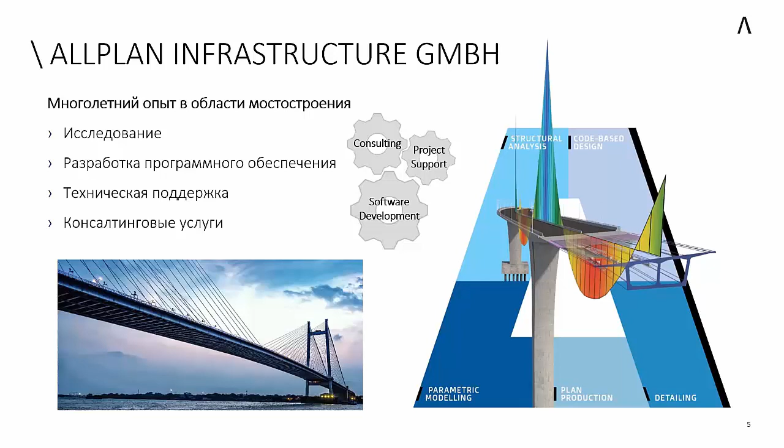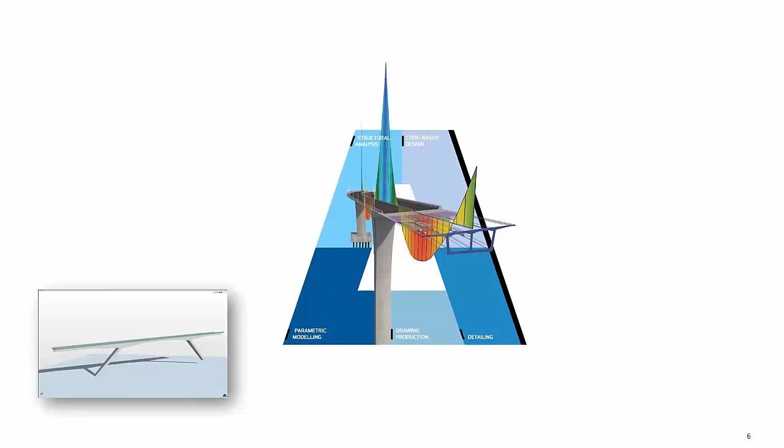The thing that we did starting from 2018 is actually developing the Allplan Bridge software as a part of Allplan. And with this software, you can start with a 3D modeling of your bridge structure, then continue with the construction sequence definition. After that, you can create the analytical model automatically from the geometrical model.

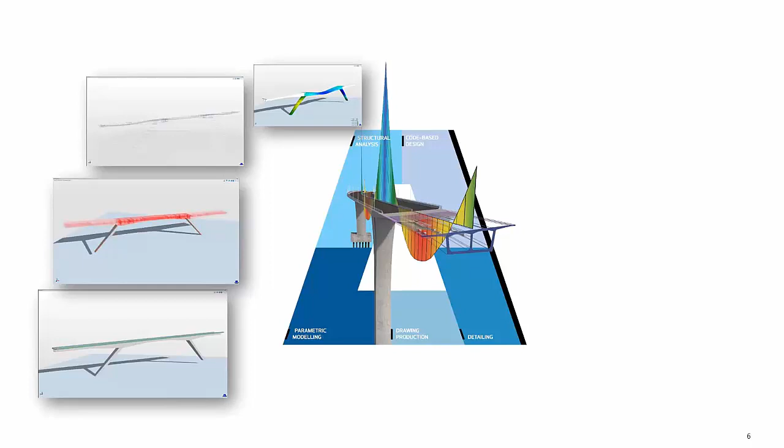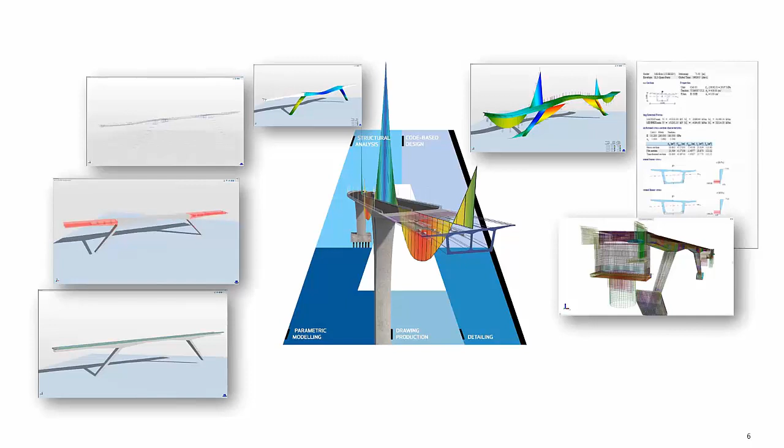Then you can get also the results, the inner forces, and starting from this release in October, you can completely do the design code checks with our solution, and then you can transfer the model further to Allplan Engineering for detailing, for production of the drawings, for the 3D modeling of the reinforcement, and also at the end, of course, to create the 2D drawings which you need for your project documentation.

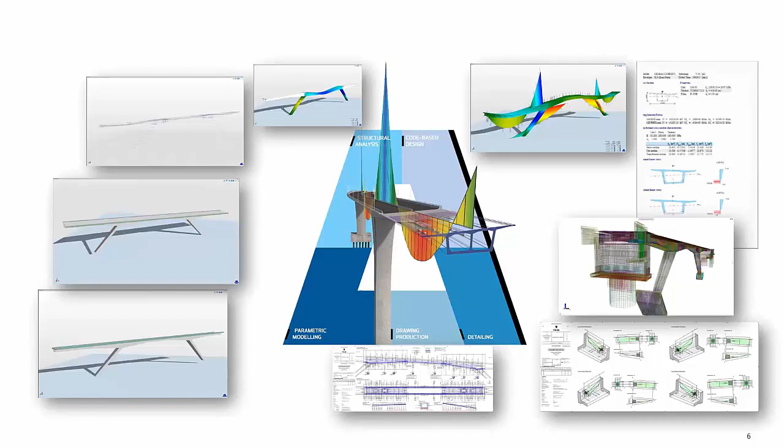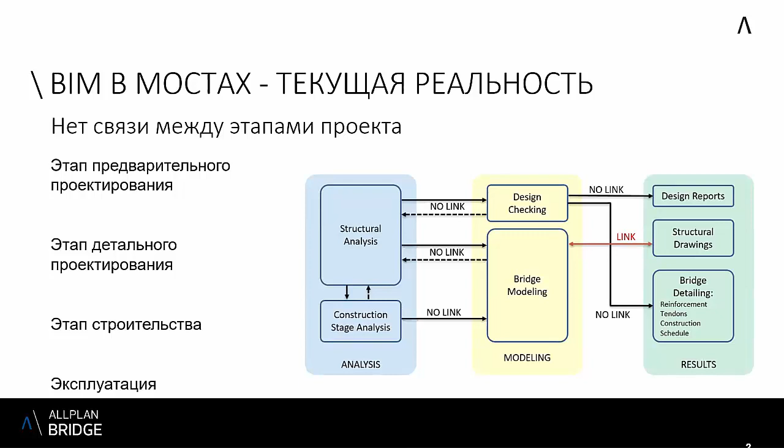So we have one goal and one idea, which is already possible to use for one project, one solution. At the moment, there is a problem that we use for one project a lot of different software solutions.

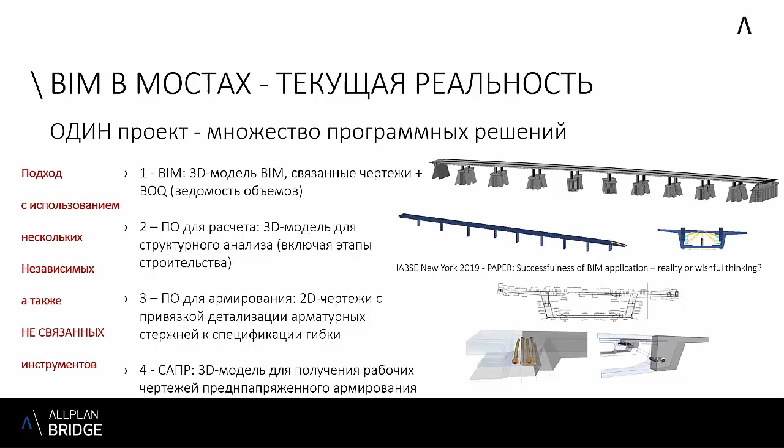So to conclude about this, we would like to have the optimal working process in the bridge industry to close the complete cycle of all the phases which are included in one bridge project. We want to stop the redundant entering of unnecessary information because we don't have the connections. We want to have the better, faster connection between the solutions.

As a matter of fact, we want to have one solution, and this will bring more economical projects and also save your money and above all save your time. So here we want to talk about OpenBIM, and this will bring you connection between these phases of the project.

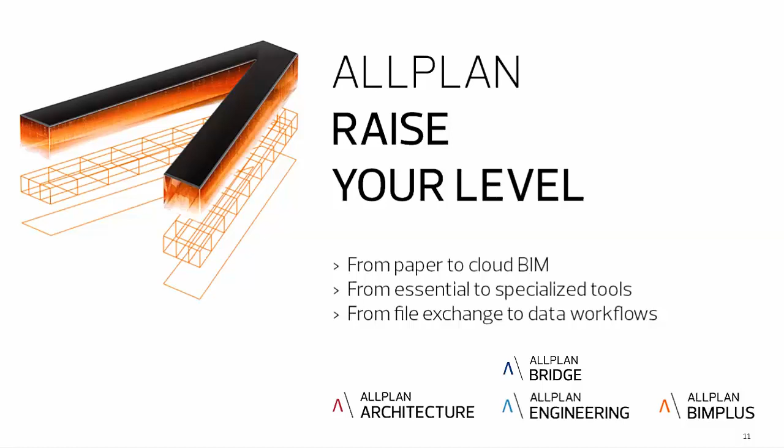So you can see here, this is just a summary of everything that we said. We can say the overall of this slide and all the previous slides is the result that you deliver your projects faster and more exact, and of course save your money and time. So we will not now repeat everything we said, but this is the summation of all that we want to deliver to the market and help you in your project with faster delivery.

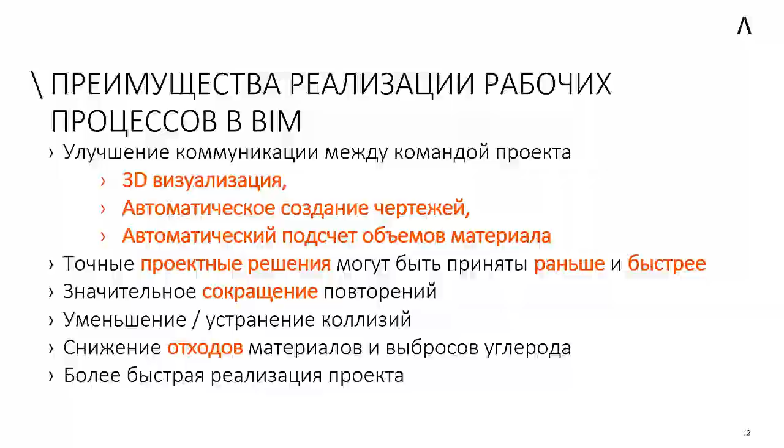Yes, so now we will show you the Allplan Bridge solution, and this is something that we can already offer you now, everything that Vladimir just said. So I will just tell you a few important things that we find are very specific and unique on the market. One of the first things is one model for everything. So one source of truth.

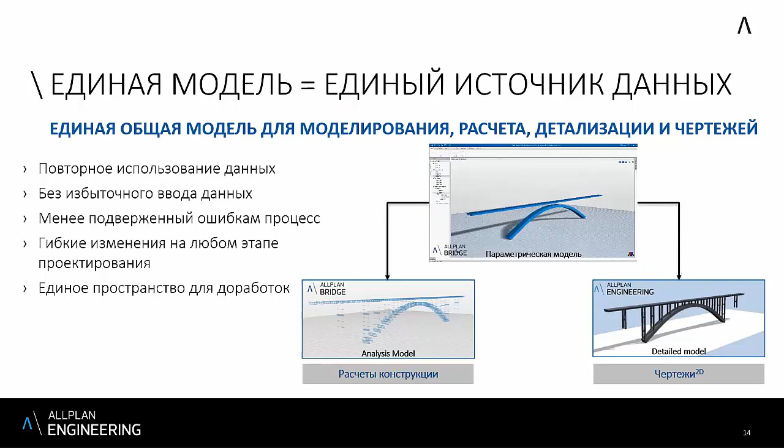So maybe you already know we have in Allplan Bridge fully parametrical 3D model of the bridge, which is based on the parametrical cross-section. And it is possible to define and model any element with different forms. There are no limitations in that manner.

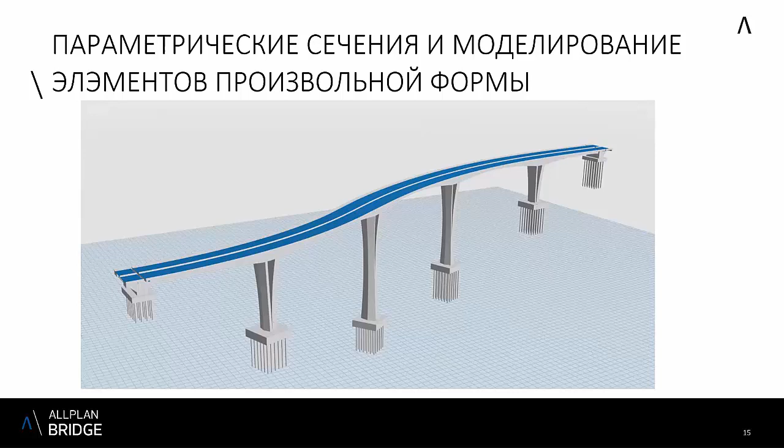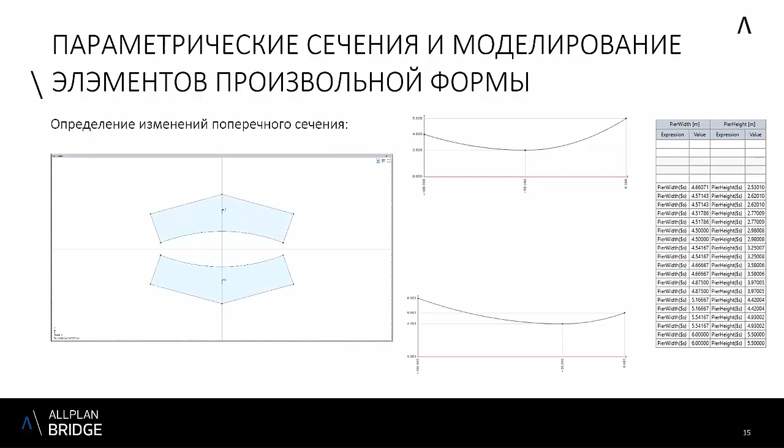Yes, so here we can see in the example of this interesting pier how you can use only one cross-section, and by defining different variation tables and variations in the cross-section, you can vary and create interesting shapes just by using one section.

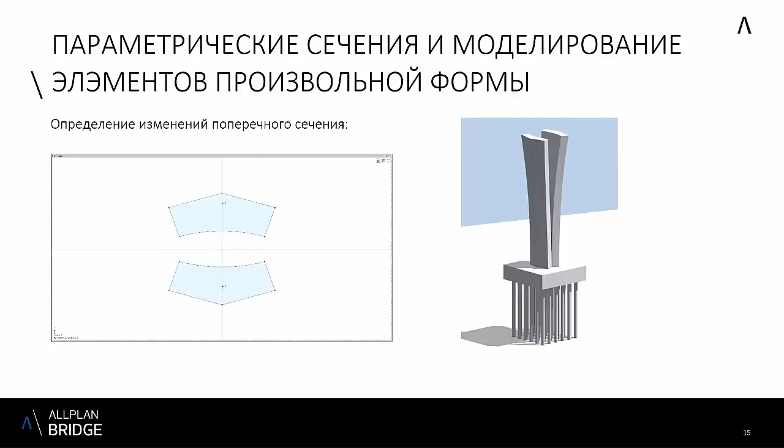We will add templates to our solution, and Vladimir with his team will help us also to build in some typical sections that are used on the Russian market. So you can use these templates of sections. You don't even need to create a section which is typical.

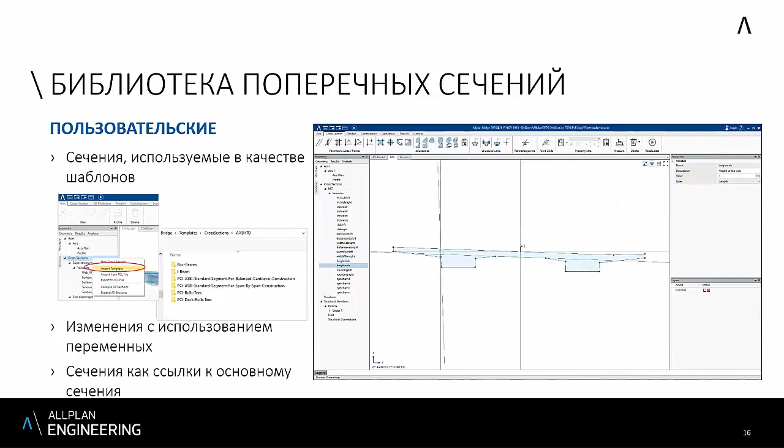We also have introduced the parametrical positions, we can call them like this, because this is the link between Allplan Bridge and Allplan Engineering.

Maybe you can translate now.

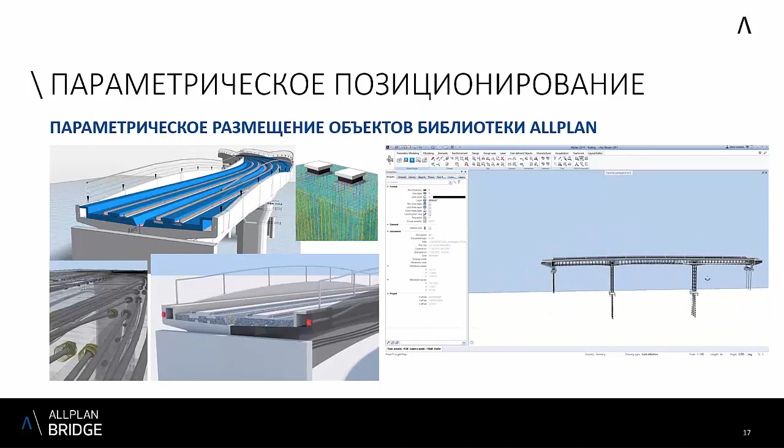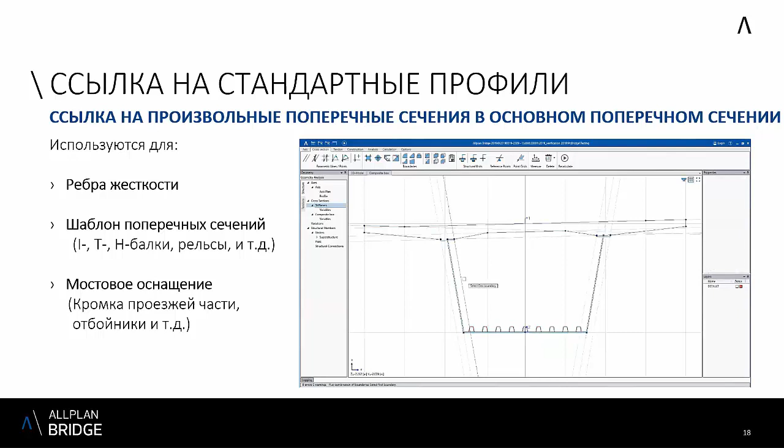Here we can see also the possibility of entering the referencing sections, for example, for stiffeners definition. As you can see here, there are stiffeners defined, so you enter one section from another in the main section, and you can then multiply them, copy them, use the array function, and you will get the stiffeners.

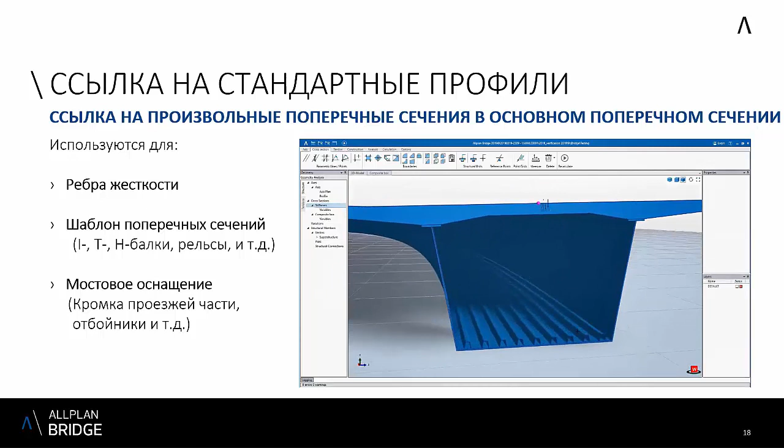And here you can see the same, but for the typical section. So if you change the source section, the full section will change, as you can see here, how fast this is done on the full section after the recalculation.

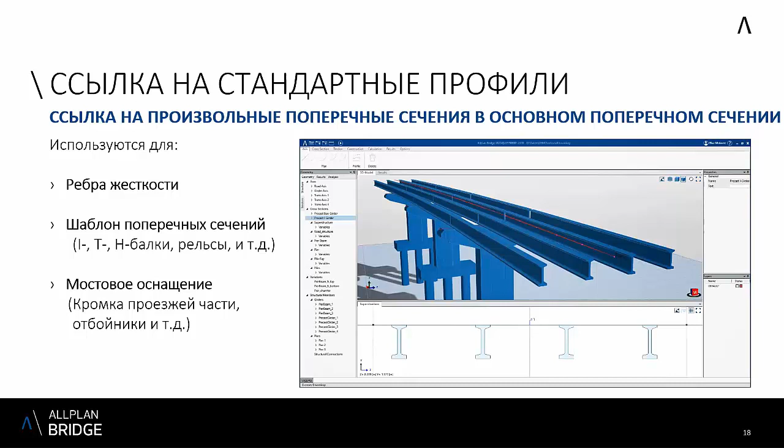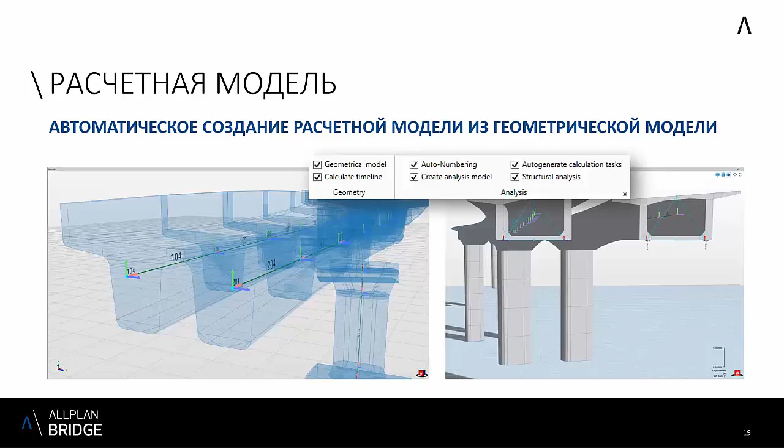Yes, so here we have also additional open BIM functionality of the software: this analytical model that we have in Allplan Bridge can be transferred or uploaded to the BIM Plus platform. And this analytical model is then available for other solutions on a cloud, to be approached with the additional API from BIM Plus and used for analysis in some other solution. So this is the model that we can export already from Allplan Bridge.

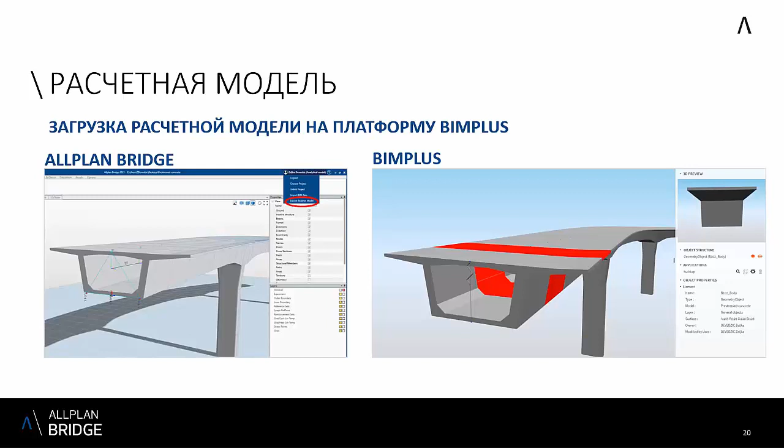So we can understand BIM Plus as a connector between different products inside and outside of the Nemetschek solutions. Over BIM Plus, you can use these data with different Allplan products of Nemetschek, with precast, and also with others like SCIA and different other products, because BIM Plus has an IFC model inside, so you can share it with other solutions, for example also with Revit and so on.

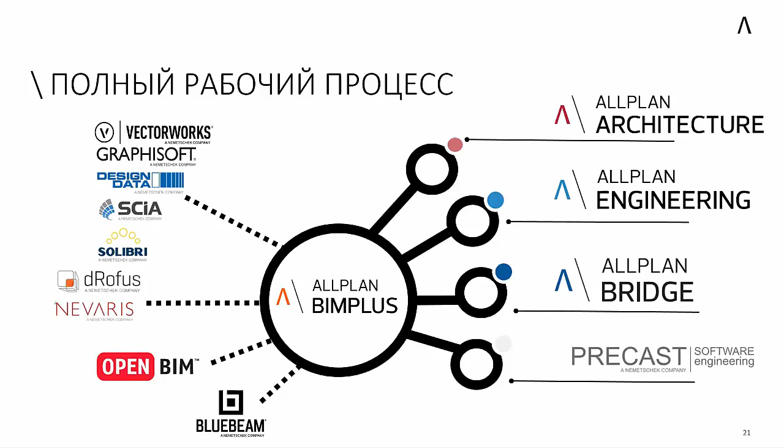And this is some exchange of the data that we can offer at the moment. So using Allplan Bridge and Allplan, you can exchange data with other solutions, not over BIM Plus, but with direct export and import functions. And you can see here different possibilities.

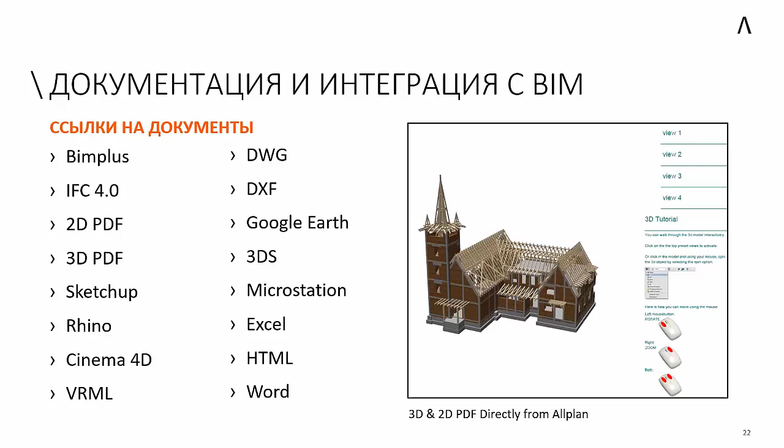So let's repeat what we said, what we have already in Allplan Bridge and what we plan to do.

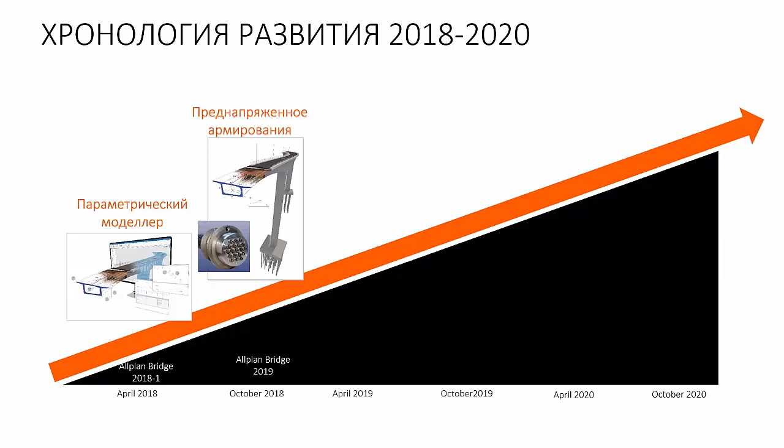Then we added the 4D stage definition and construction stage definition.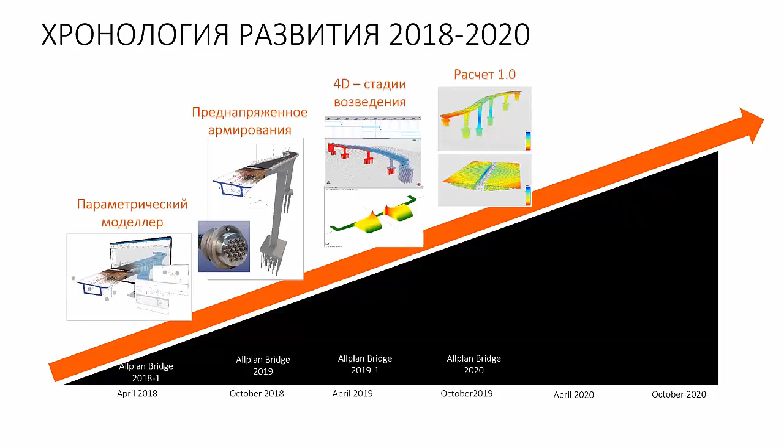And this year, the first technical basics were delivered for the calculation. And at the end of this year, in October, we delivered the full code-based design in version 2021. And we are going now further with other detailing.

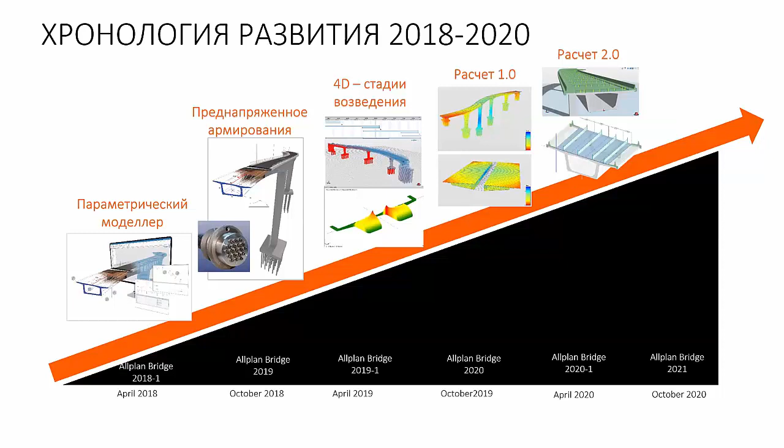Here you can see this is the last version, 2021. What we plan to do in the next version, of course, beside the analytical part, is to extend the capabilities of the modeling part.

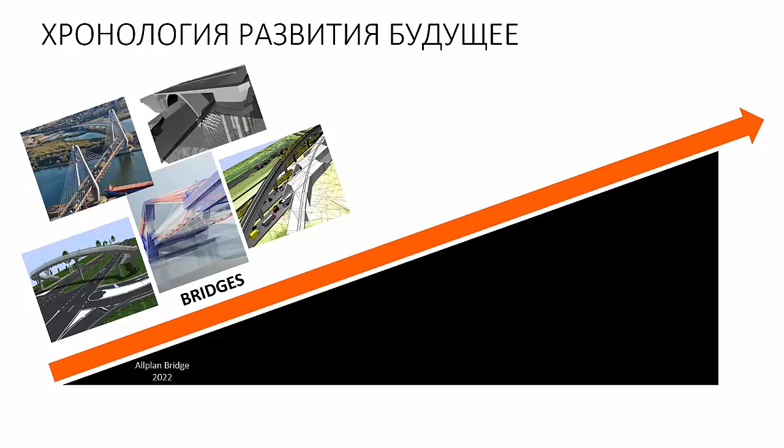So in the future, as we look at the next versions, we want to focus a lot on infrastructure. That means also roads and tunneling. And we can say that next year, at this time, the new road part of Allplan will also come, so that you really have everything in your solution, including the road part. So infrastructure will be the big focus of our future development.

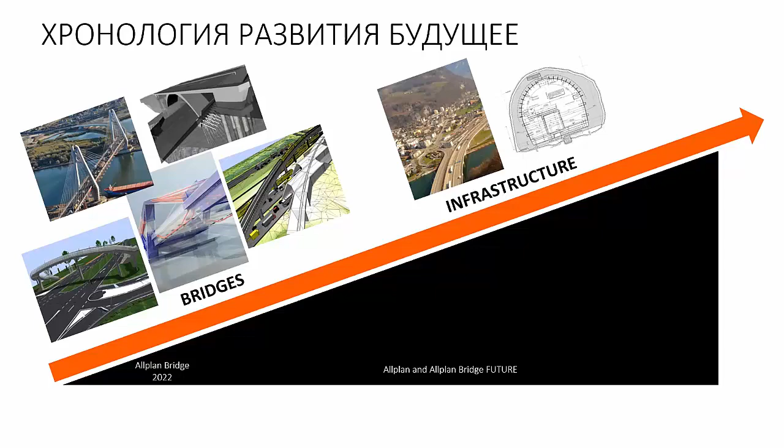I will just take 3 minutes now, because we are having this double talk and it lasts longer, just to tell you about our portfolio, some project examples, and the markets where we have our users.

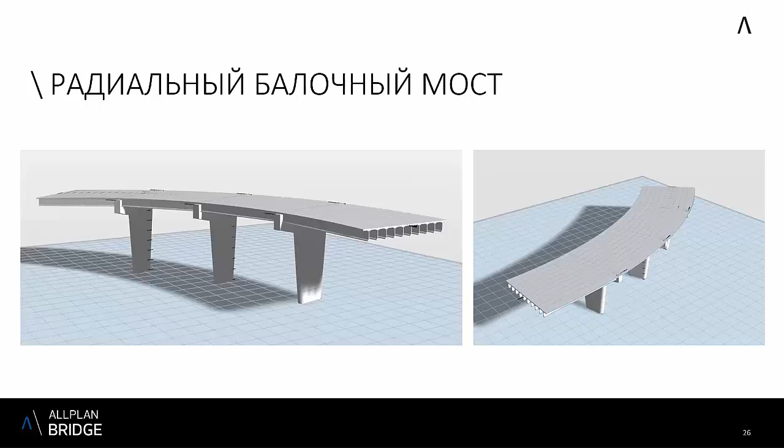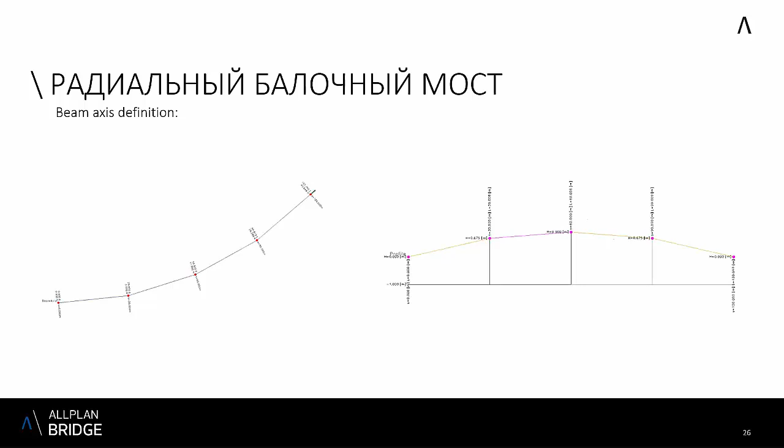Okay, so there are some interesting bridges I want to show you. Maybe this explanation will not even be necessary, Vladimir, but you will see. The pictures will say everything. Here we have one curved bridge, which is a girder bridge, as you can see in the description. The problem with these bridges is that the road axis is curved and the girder beam axis is polygonized. So how to obtain this? This is possible to define in our solution.

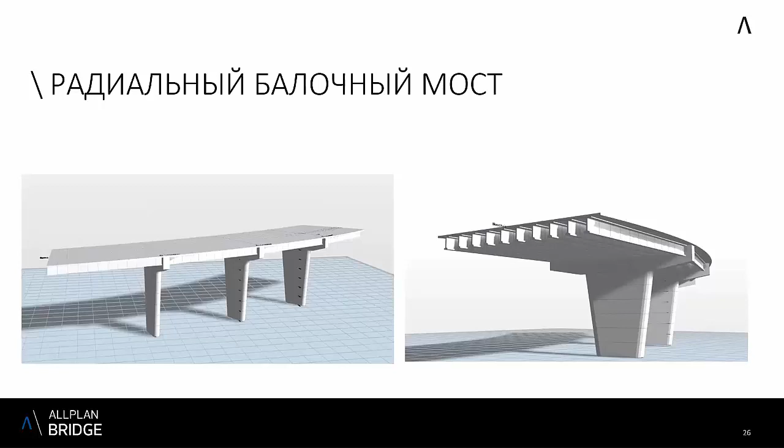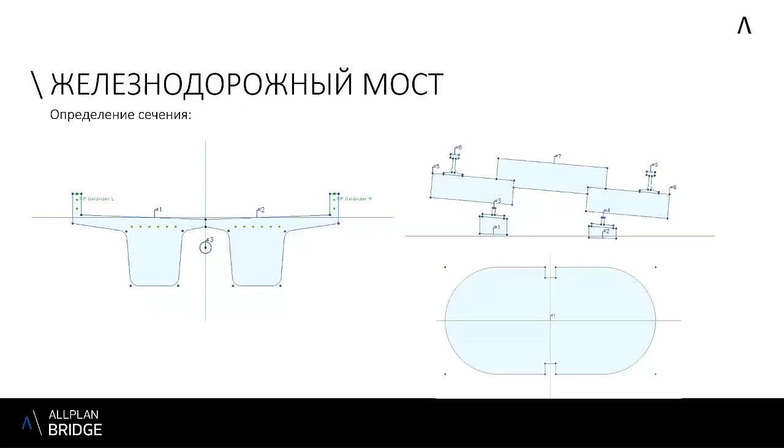Also, not only road bridges, but railway bridges with these typical railway bridge sections can be defined to the very detail in Allplan Bridge as well.

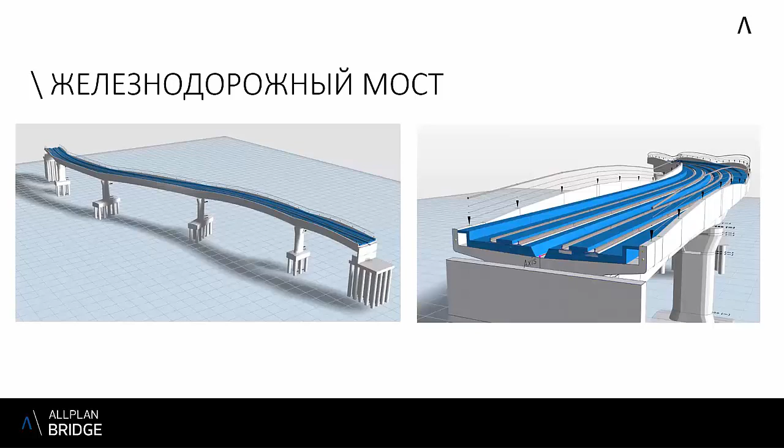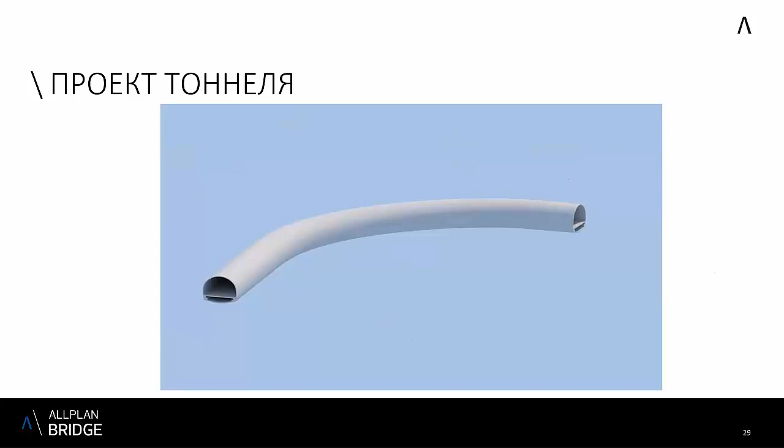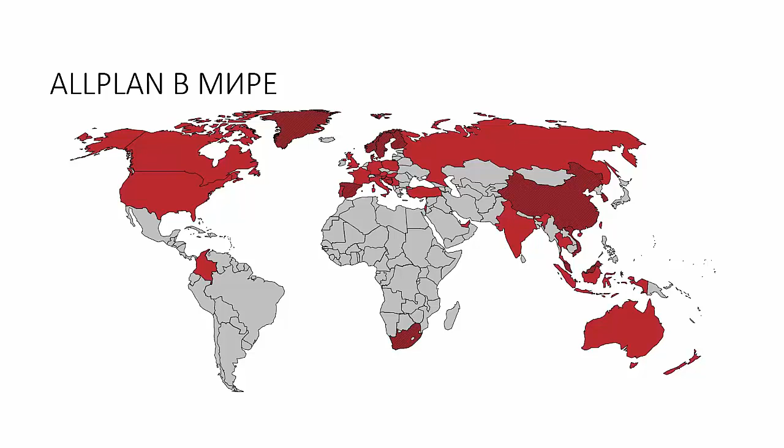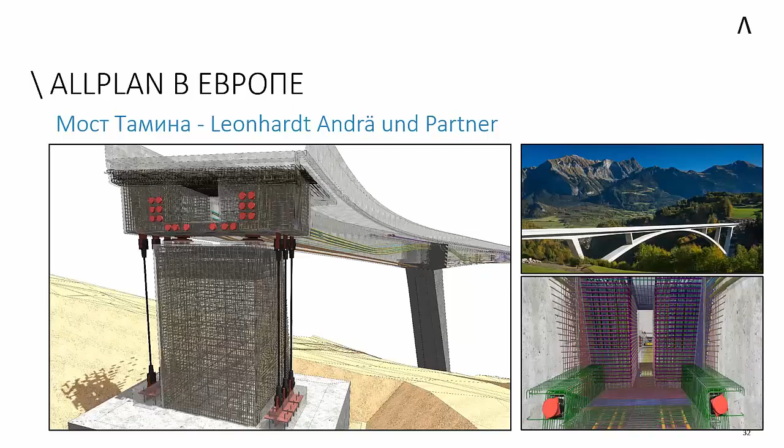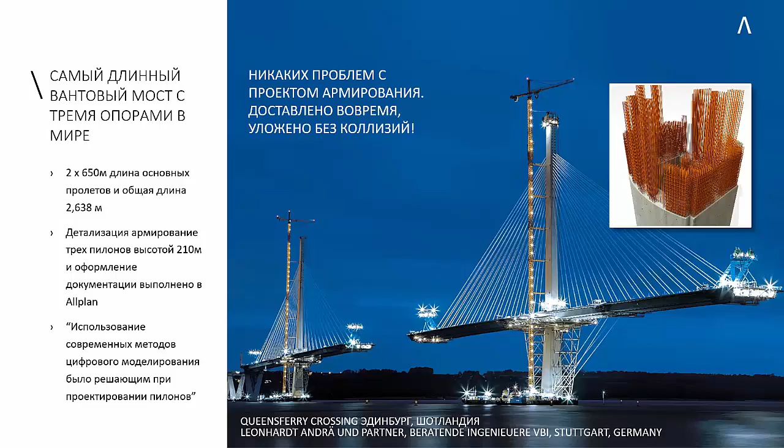So the other bridges, I will just go through. The text is not necessary, so you can see the deliverables for the project, the drawings, the reinforcement, and everything is shown, so you can just read. So in different parts of Europe where the software was used.

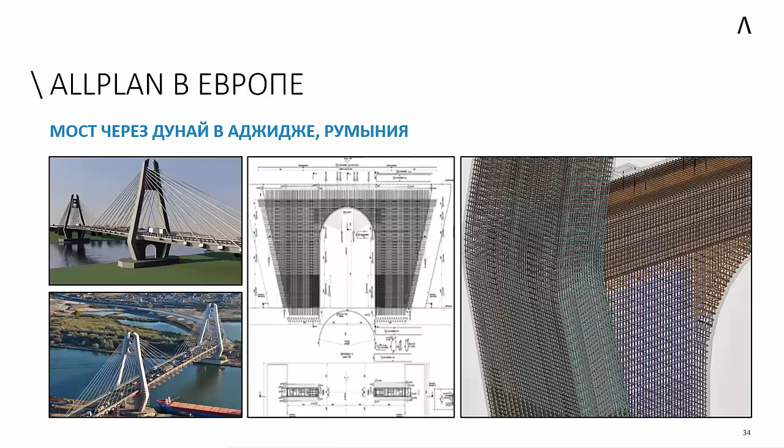For example, this one, then in the Netherlands, you can see these massive piles and piers which are reinforced.

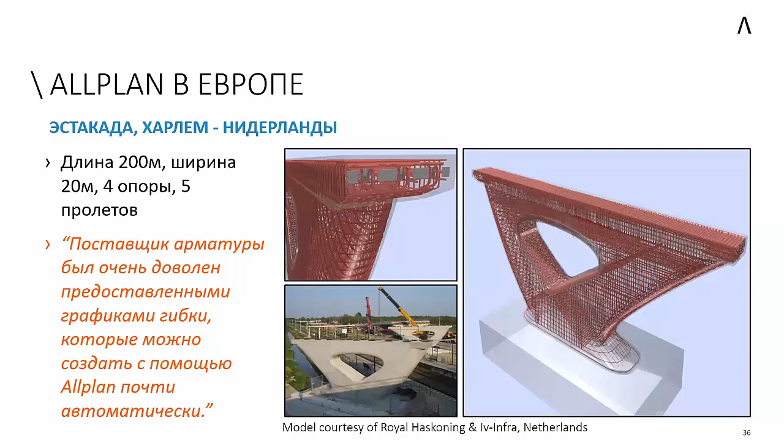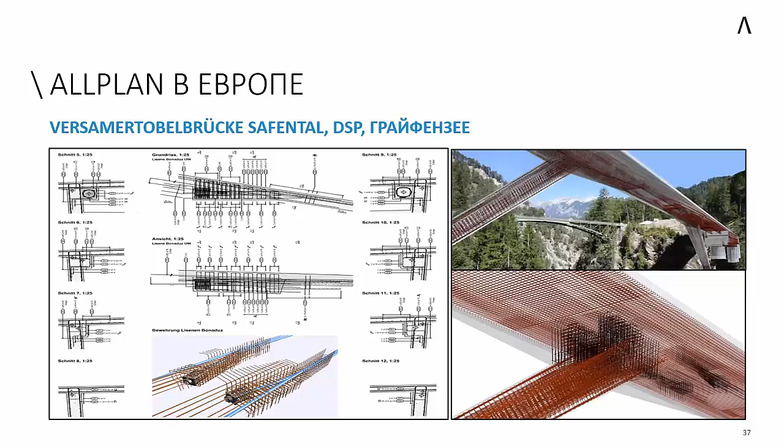Here again in the Netherlands, flyovers, yes, also the same massive concrete piers. Then we have this bridge, which is just showing the reinforcement here and the delivered drawings in Allplan. Then we have in Germany this bridge, which also has a part of the arches, which is possible to be defined, and you can see also these foundations with anchors.

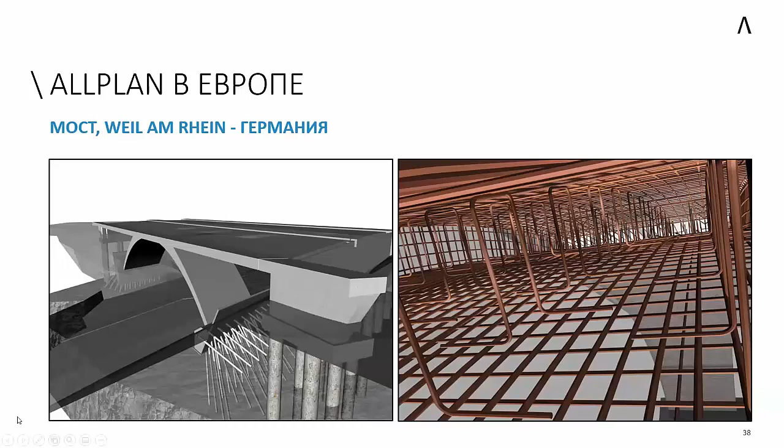Here again, an interesting bridge in Switzerland.

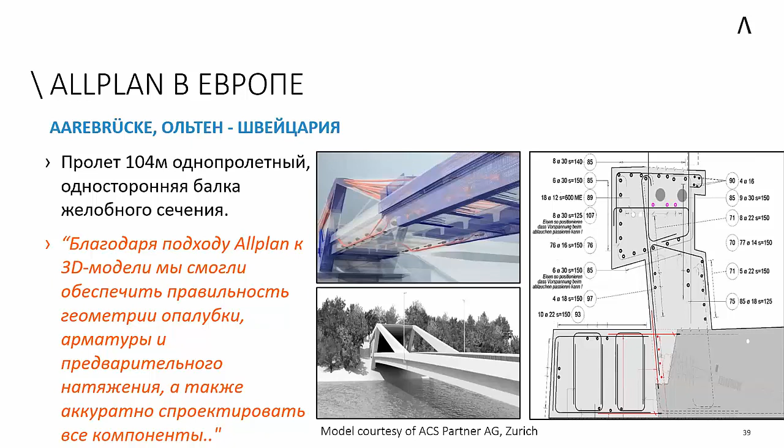Yes, this is what we explain later. I think also dynamic change of the sections. Then we have the Netherlands, again, one type of the bridge.

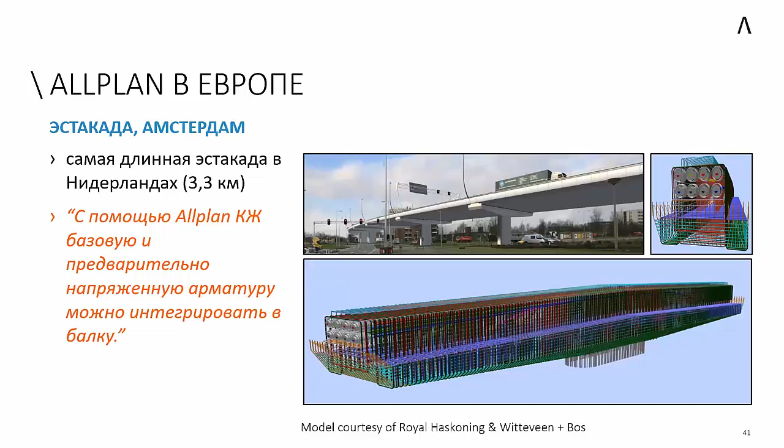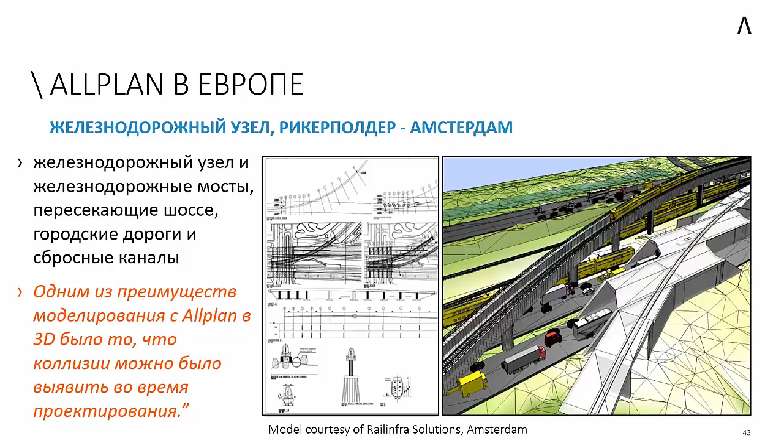So these are only the start projects of some of our users, so there are no explanations, but the steel sections which are possible to be defined in our software as well.

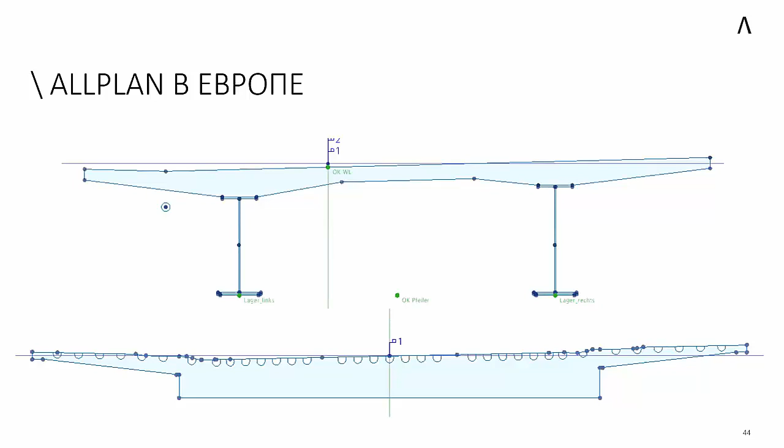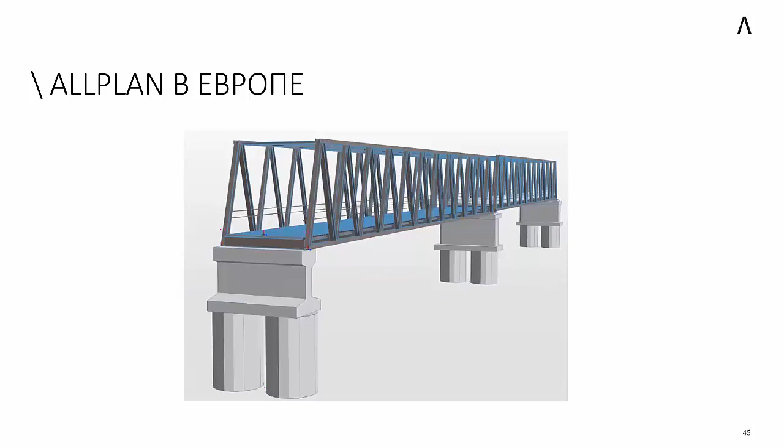And also truss bridges, which some of our users managed to model in Allplan Bridge, with very sophisticated details which are available also now. And of course, we will work on this in the future, for every release, some new help for you to define these kinds of bridges.

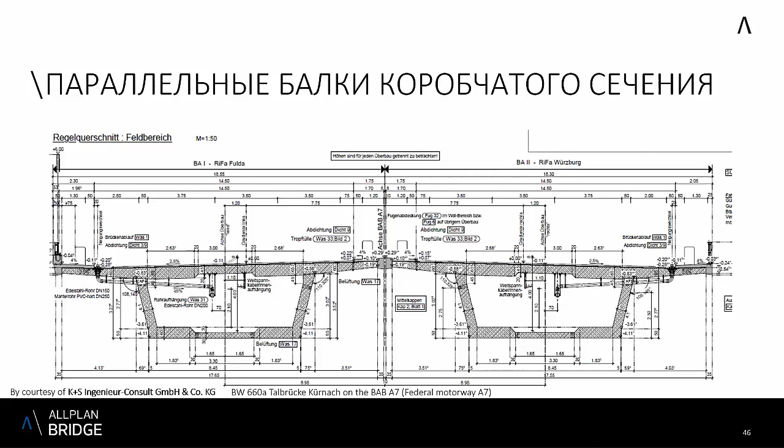Here we can see one special project from K plus S Ingenieur-Consult GmbH. So this is a German company. Two parallel hollow boxes with different axes and one section for pier and main girder made for all these different changes, and this interesting model of the bridge in Bridge and in Allplan Engineering later as well.

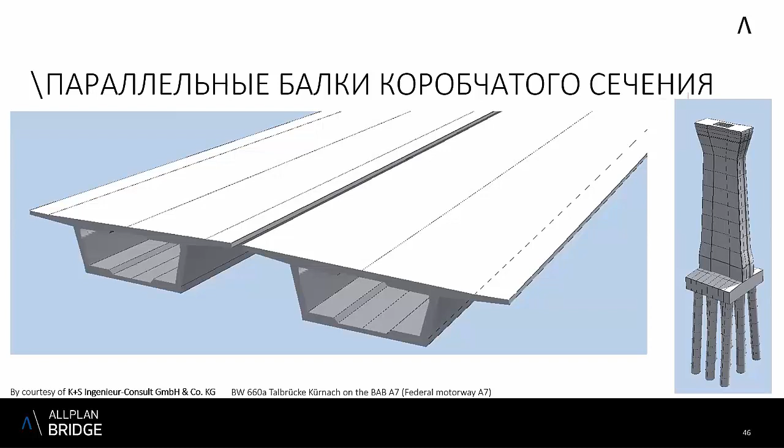Then something like this, again, one German company, these massive parts. As you can see, a model and rendering.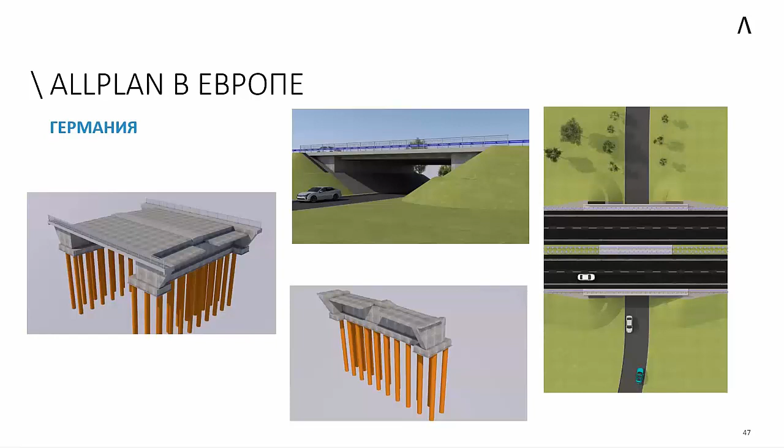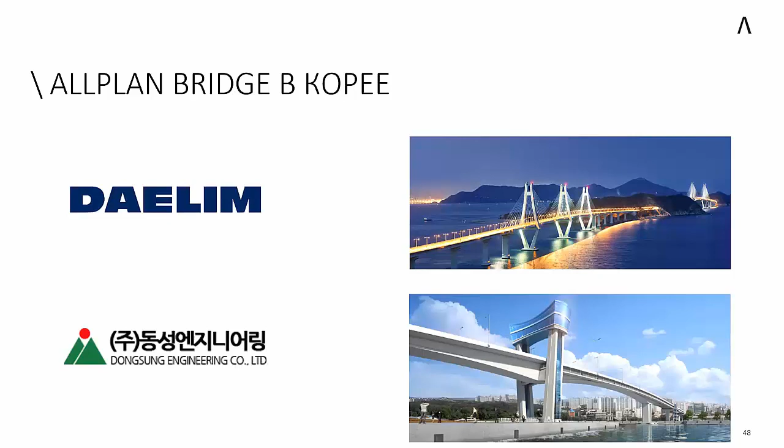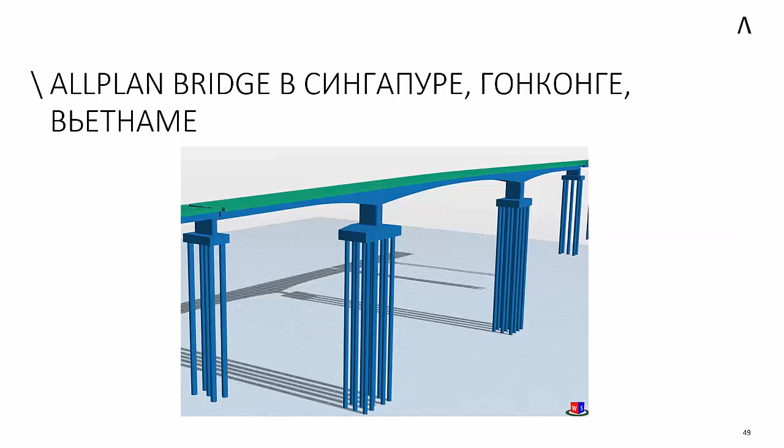As you can see, also full sections, full segments, completely reinforced. So these are all ongoing projects of our users in those three countries.

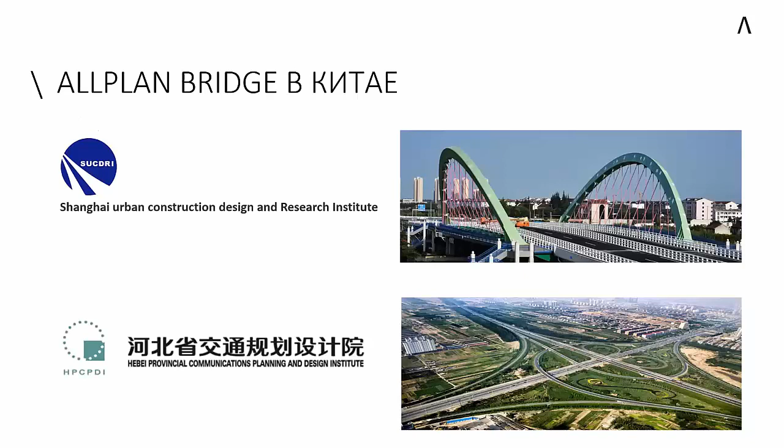So then we will go to China. These are also users from China, because we just started there.

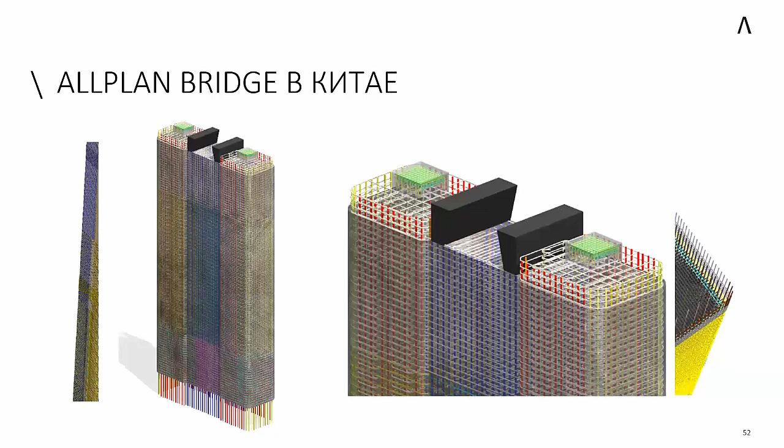Or some complex shapes like this.

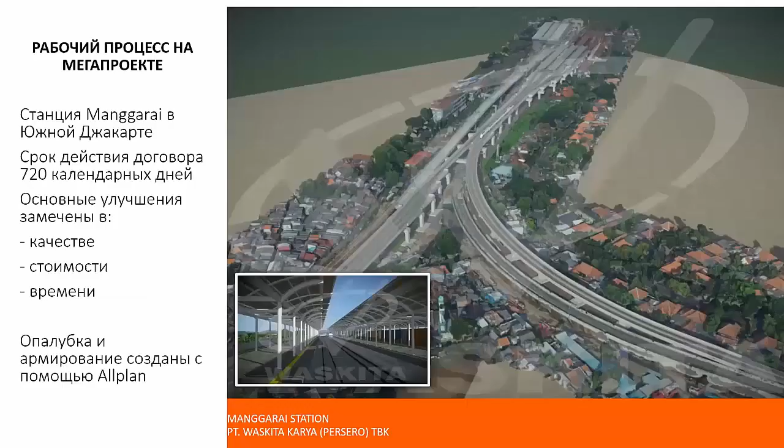And I will finish with Indonesia, where we have a bigger market where the users are included in mega projects like this railway station, which is located in South Jakarta. And you can see how complex this is, and a lot of bridges joining together with some parts of the road. So this is something that they do also at the moment.

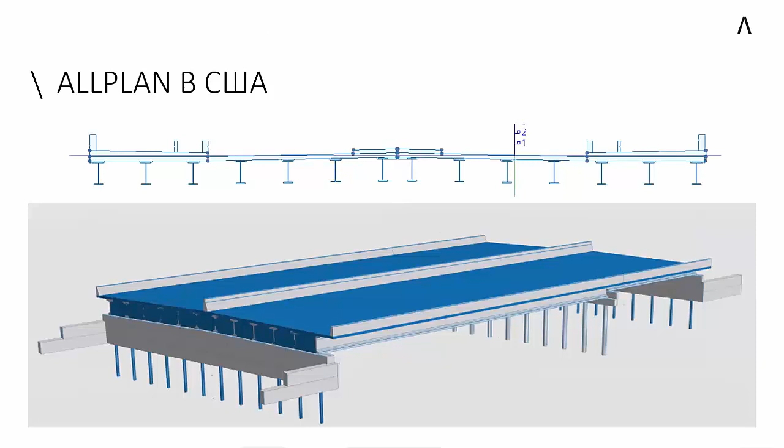To the USA market, with some of our users at the moment, and we can see the typical sections they are modeling and using for training for their new users. Also, we can see these amazing bridges which are modeled in Allplan Bridge, also in Allplan Engineering together. For example, here they did also terrain, a surface.

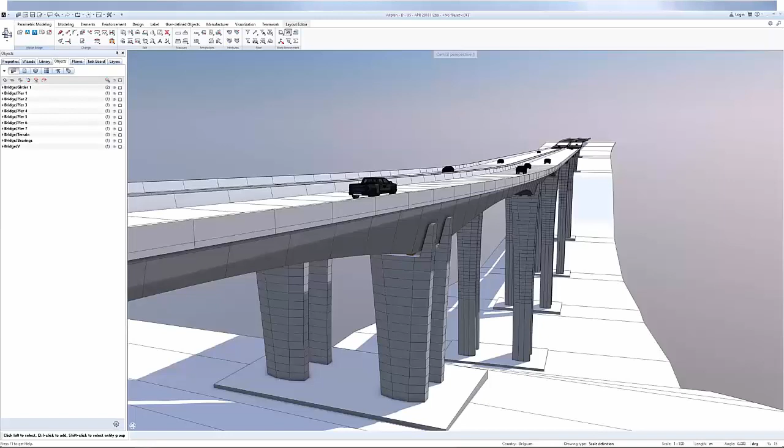Американские проекты различные, интересные, мы видим тоже сложные, в части включают и цифровую модель местности. And also something like this. Что-то вот такое симпатичное.

So at the end, just to show you few impressions of our users. Несколько слов, которые сказали наши пользователи, which is very important for us. It's exactly this technical support and the customer which is successful, actually it's something that can give us the best marketing and the best commercial, of course. Нет ничего лучше для нас, чем реклама, которая в виде сарафанного радио. Сарафанное радио по-немецки называется пропаганда изо рта в рот.

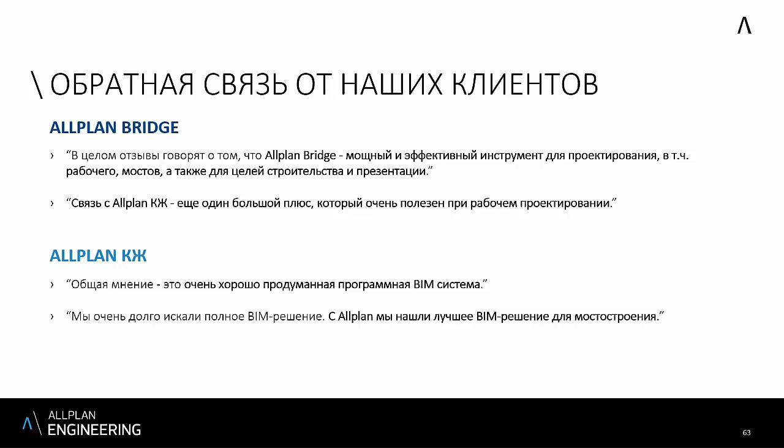So these are some comments from the users and what are actually the highlights and the main things, because and why you should choose our solution is that it's innovative and everything is written here. So it's innovative, it's fully parametrical, it has open BIM, it has one model for all the phases, modeling, design and detailing. It is very user-friendly, it is exact, and it will save your time, your money. You will not have errors, you will share data with everyone.

We have intellectual database, very sophisticated technologies included, and you will always get help from our side as we are involved also in bridge projects. So one in all solution for you from our side, from our team, which is a specialist in bridges, from the Allplan team as a full product owner, where they can give you help regarding the engineering, then even more. Then we can talk also about help from our partners in Russia, and all together we are here to help you and to give you some good solution and to deliver something for you. This is what we do every day.

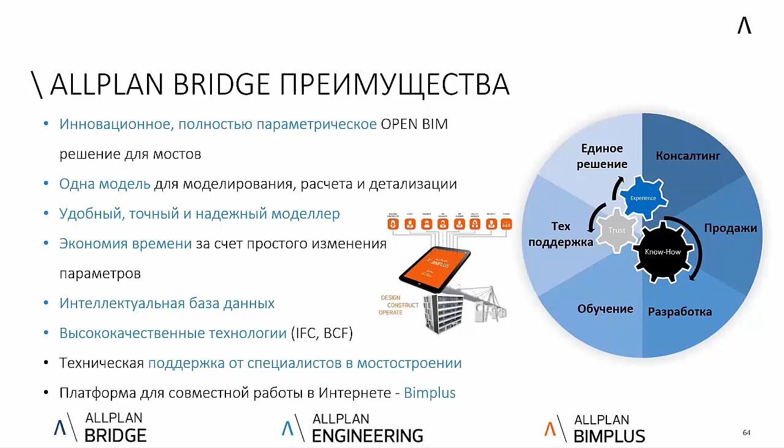Итак, Allplan — современная программная система, инновационная, параметрическая. Дальше особенности здесь все в принципе написаны, а также мы вместе с ним, то есть команда внедрения в Граце и в Мюнхене, и нашего Allbau Software, которая может обеспечить вам не только поставку, но и консалтинг, обучение, техническую поддержку, при необходимости доработку каких-то параметрических объектов, либо функций, которые вам дополнительно хочется получить индивидуально вам, основанной на нашем опыте и ноу-хау, а также доверии.

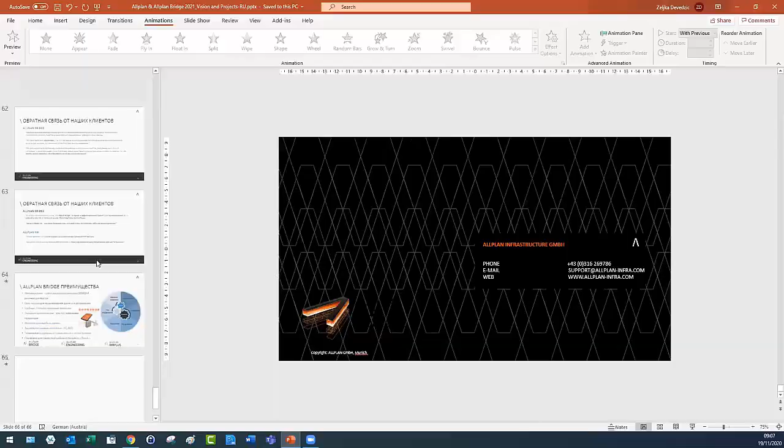Это там, где была одна кривая ось, и оси для балок были прямые. Роман, если мы правильно поняли ваш вопрос, да, это была параметрическая модель. Yes, we can also share this with you, show you how to do. In a new version, as I said, we want to introduce something that is more user-friendly, and for now we have some workflow how to define this to be parametric. Это делается не очень просто действительно сейчас, но это параметрически. Мы планировали у себя в Allbau маленький workaround, как сделать это более удобно, но Желька сказала, что у них в основном движке запланировано уже усовершенствование. Как сделать это удобно? Параметрически уже и сейчас, но будет еще удобно.